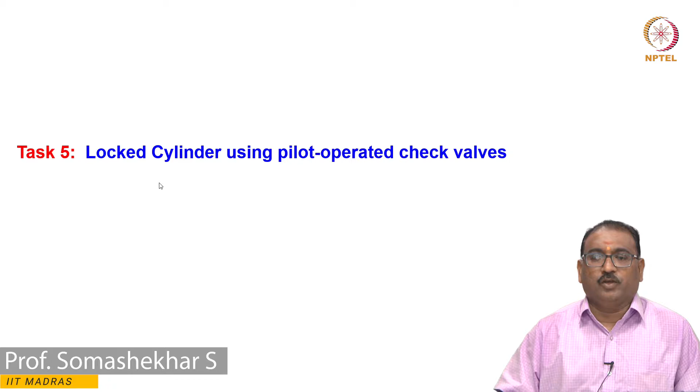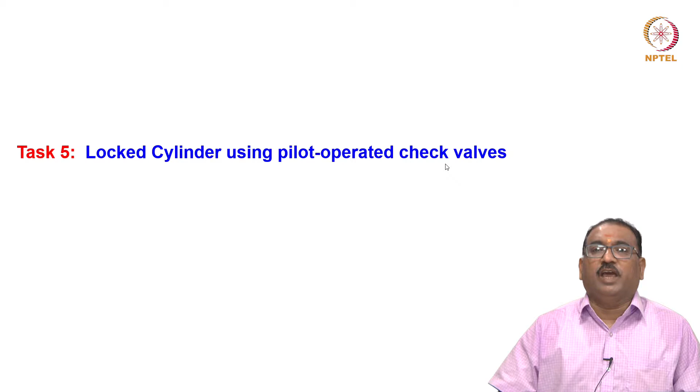Now we will see some more applications of the hydraulic circuit. Sometimes during extension and retraction we need locked cylinders. This is achieved using pilot operated check valves. Otherwise, after extension the cylinder may come back due to leakage and other losses. To overcome this, the cylinder should be locked in position. We achieve this using pilot operated check valves, which ensure locked cylinders.

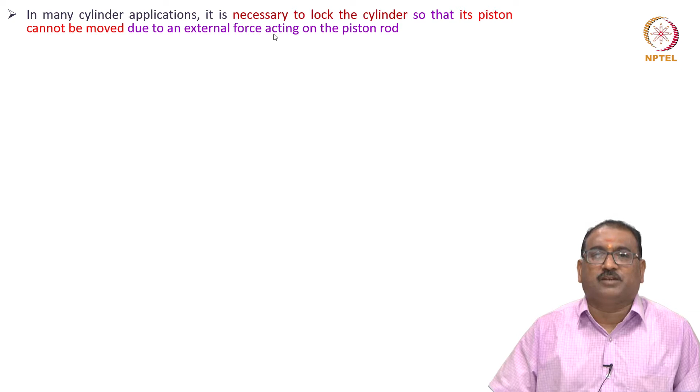As I have told you, in many cylinder applications it is necessary to lock the cylinder so that its piston cannot be moved due to external force acting on the piston rod. One such method for locking the cylinder is by using the pilot check valve as shown in the figure.

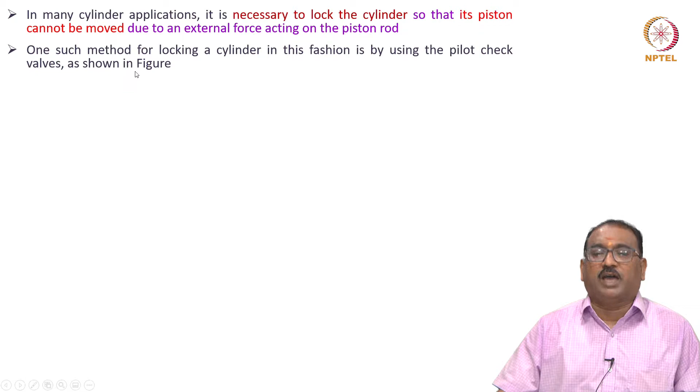You will see here the power pack, the 4/3 DCV in closed neutral position, and I am using NRV1 and NRV2, non-return valves, connected to a single rod double acting cylinder. I am using a pilot signal to operate NRV2 from this line, and a pilot operated line to open NRV1. This ensures the locked cylinder position. How this happens, we will see.

The cylinder can be extended and retracted normally by the action of the direction control valve, as we have seen previously, nothing else.

Please note, if regular check valves are used here instead of pilot operated ones, the cylinder could not be extended or retracted by the action of the DCV, because with a simple NRV, pump flow will come but get locked. For example, if you push this button, pump flow will come here, but here it is in a locked position. But if you use pilot operated valves, this will open when sufficient pressure is built here. That is the beauty of pilot operation.

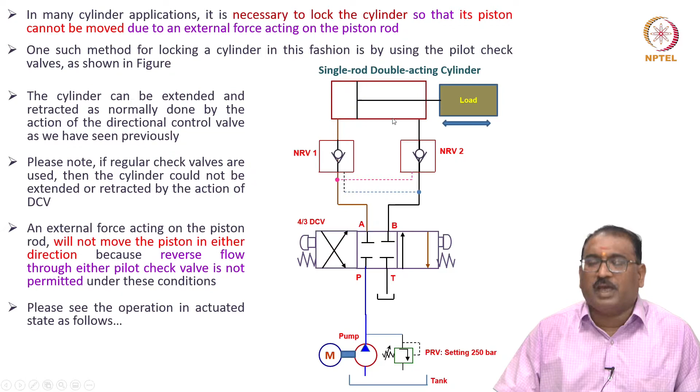Please see the operation in the actuated state. Always you have to draw the circuit in the null position, meaning no flow to the actuators. Now we will see when I operate the right side of the DCV button by pushing it, the pump flow enters here, lifts the ball, and goes to the head side.

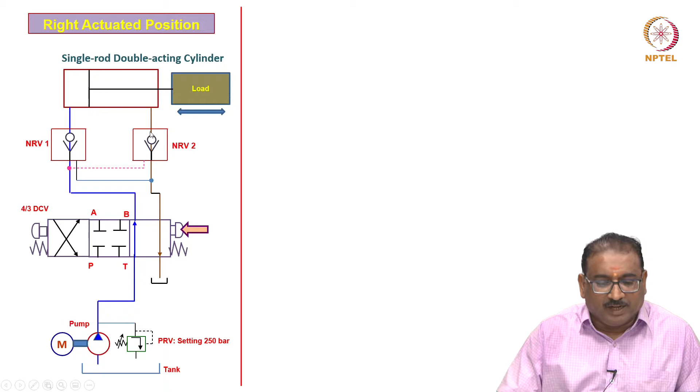Why does it open? After building pressure here, the pilot lines sense this and lift the valve, allowing return flow to take place. Similarly, when you press the left side of the DCV to get the crossed configuration, the pump flow will go to the tail side.

Whatever flow is there at the head side will come here. When does it open? After building pressure, because the pilot lines are there, you will see it lift. This pilot line is actuated, the ball will be lifted, then the flow goes to the tank.

But when you shift to the middle position, what happens? The cylinder will be locked in any position. That is the beauty of this circuit.

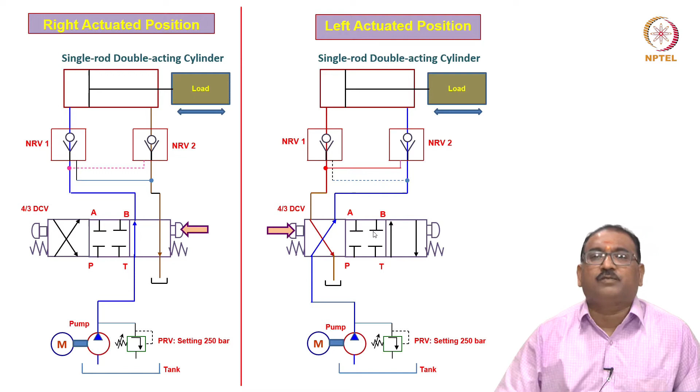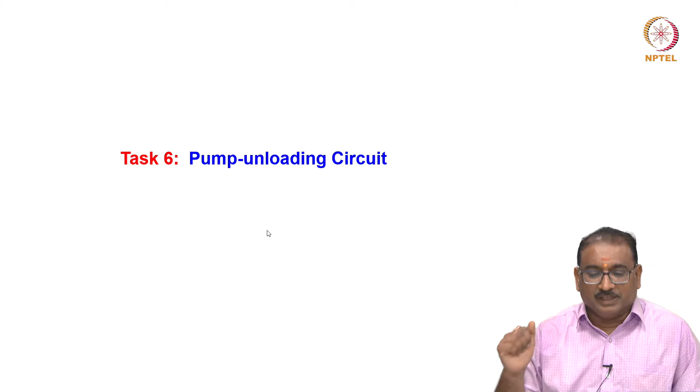Now we will see the pump unloading circuit. Sometimes when the cylinder extends, the pressure starts building, and generally we safeguard the pump by providing a PRV. But sometimes, for example in punching or bending operations, a large stroke and very high speed of the ram is required, then after reaching the workpiece we have to slow down the speed. In such cases, the pump unloading circuit plays a major role.

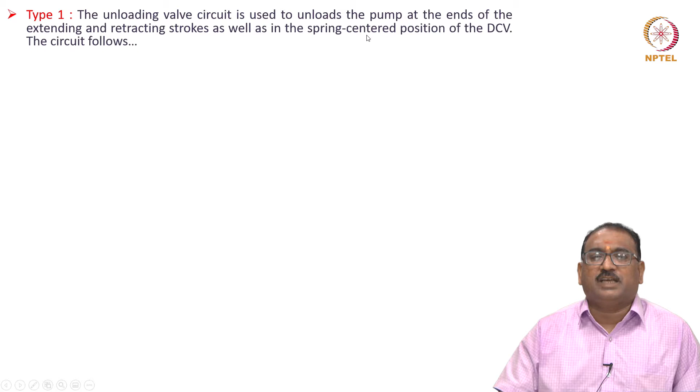Let us see now. I am showing you different cases here. Type 1 is the unloading circuit used to unload the pump at the end of the extending and retracting strokes, as well as in the spring centered position of the DCV. The circuit looks like this.

You will see the null position. It is a single rod double acting cylinder again here, with a 4/3 DCV. The middle position connections are shown here. Here I am using two valves, one of which is an unloading valve.

Here I am setting the unloading pressure rating as 100 bar. Then one more is there, the pressure relief valve, which is set at 250 bar.

Now we will see the unloading valve will read the pressure from the other lines. See here, it will read the line. Now I will show you how the unloading valve and PRV will operate.

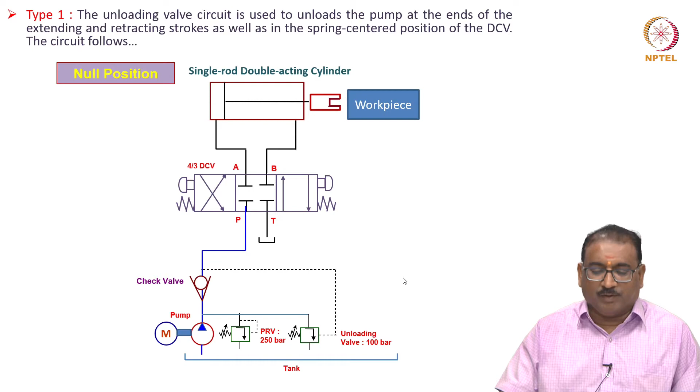Now we will see, right actuated button. When you press this, what happens, friends? The pump flow is coming here, then it enters the head side, then the piston starts extending. The pump flow is completely exposed to the head side, so it will move very fast.

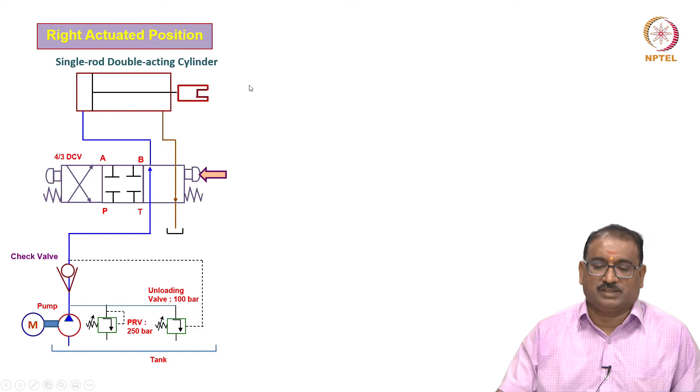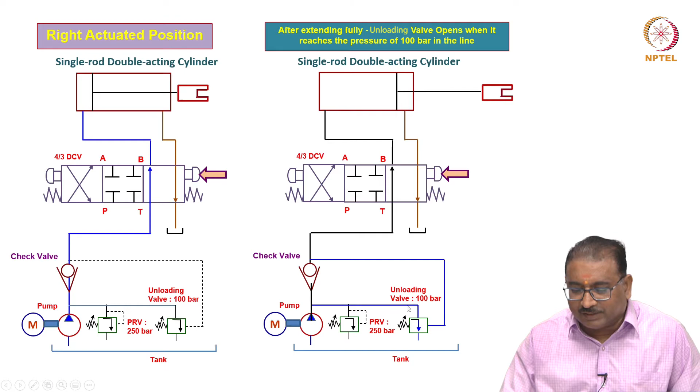Now we will see, after extending fully, the unloading valve opens when it reaches the pressure of 100 bar in the line. When 100 bar is reached, after full extension, the unloading valve shifts and opens. Then the pump flow comes here and unloads through this until you shift the valve.

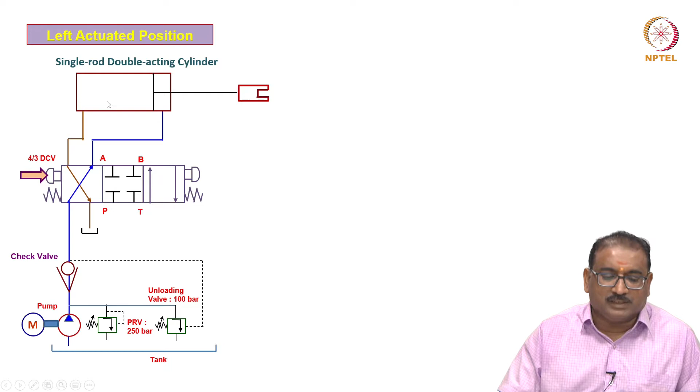Now we will see, when you press the left button of the DCV, what happens immediately? The pump flow comes to the tail side, then it is pushing, and whatever flow is at the head side goes to the tank.

But you will see, friends, after retracting fully also, the unloading valve opens when it reaches the pressure setting of 100 bar, which is less than the PRV. Once that pressure is reached in this line, the pump flow does not go to the circuit, it bypasses through the unloading valve, since the unloading valve pressure is less than the pressure relief valve.

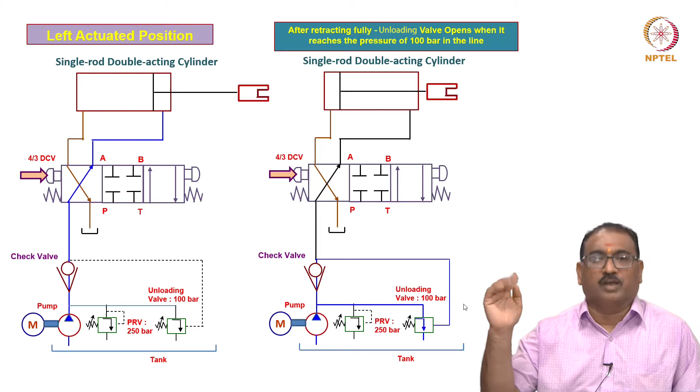As I have told you, when it is retracting completely, we have to bypass the flow through the unloading valve. Now I will show you how it operates in the punching operation, using the same circuit.

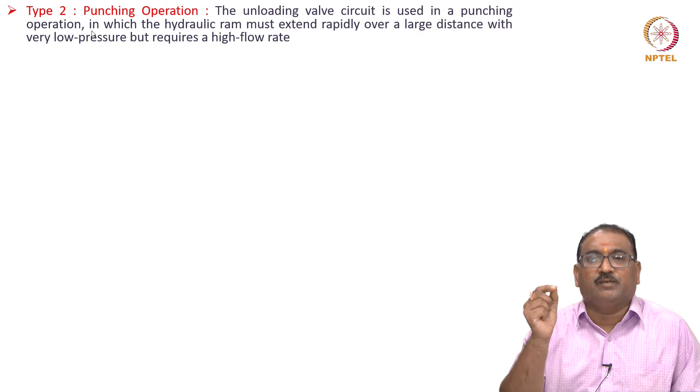You will see the unloading valve circuit is used in the punching operation, in which the hydraulic ram must extend rapidly over a large distance with very low pressure but requires a high flow rate, because I want to move very fast with no actions until it reaches the workpiece. However, during the short stroke, when the punching operation begins, the pressure requirements are high due to the punching load and resistive forces, and hence the flow requirements are very low.

In such cases, we have to use dual pumps, as I am showing you now, which may be driven with the same motor or a separate motor.

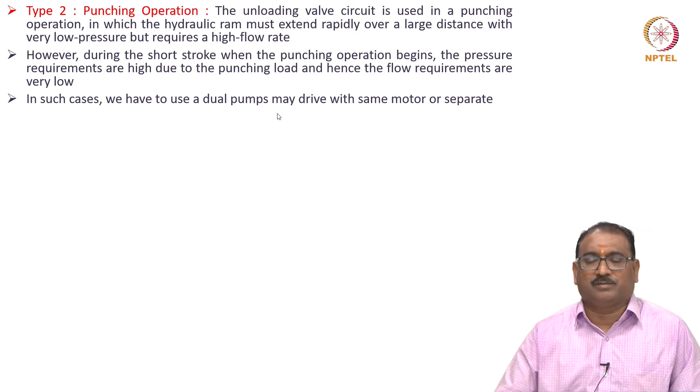Let us consider pump 1, which is a low pressure high flow pump, and pump 2, which is a high pressure low flow pump, required during the punching or bending operations. After reaching the workpiece, the actual operation will start.

Very short distance, it will move with very high pressure to complete the task. So the circuit eliminates the necessity of having a very expensive high pressure high flow pump by selecting the above two types of pumps to serve the same purpose.

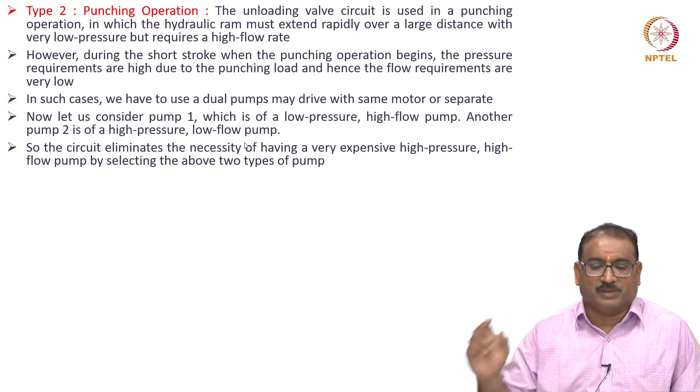Let us see now how it is. Here, pump 1 is a low pressure high flow pump. Pump 2 is a high pressure low flow pump, it produces low flow. Now I am using check valve 1 and check valve 2 to separate this one and this one.

Now, as I have told you, here is the unloading valve again. Here I am setting the pressure at 50 bar, but the PRV setting is greater, as I have told you, 250 bar.

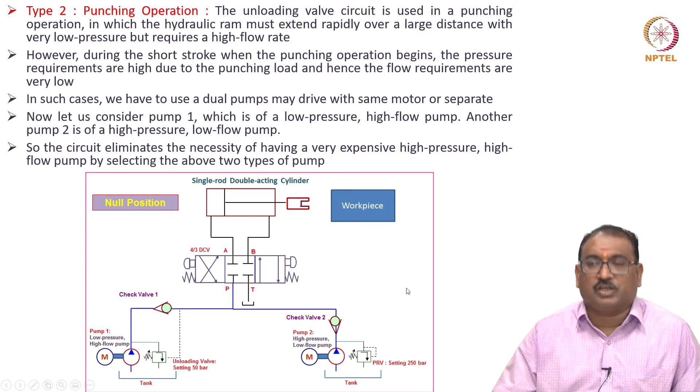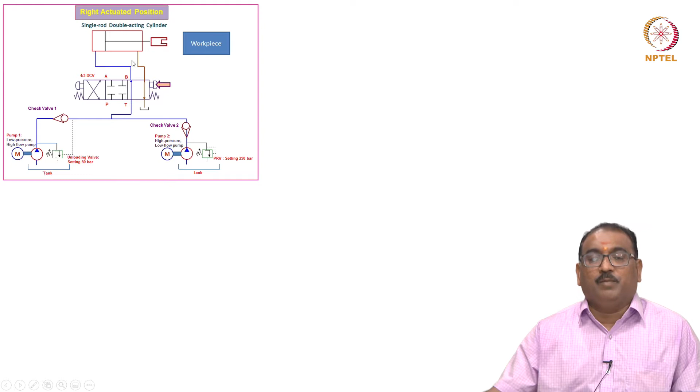Now we will see how they operate in the actuated positions. When I press the right side of the DCV, what happens? The actuator head will receive flow from the low pressure high flow pump as well as the high pressure low flow pump, meaning a large quantity of fluid is entering the head side, so it will move very fast.

After reaching the workpiece for punching or whatever the operation, the pressure starts building in the head side. Once it reaches the 50 bar where you are setting in the unloading valve, it will open. See here, flow is sending here. That time actual punching operation is required.

Then what happens? It requires a very low flow rate which is supplied by the low flow pump. Pump 2 is sending the flows. But this check valve 1 isolates from the circuit because the fluid will not enter the pump 1 inlet. That is why this check valve will do the purpose. Then it will complete the work with a shorter stroke with high pressure, as big high pressure because setting is 250 bar, no need to worry.

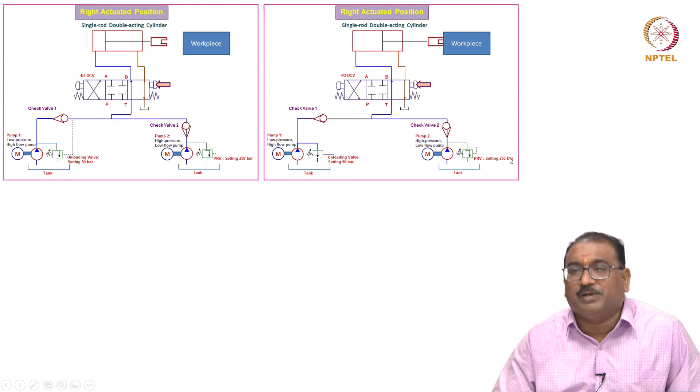When you press the left side button, automatically what happens? You will see the tail side of the piston is subjected to the flow from the high flow pump and low flow pump. Then it will retract very fast after punching the workpiece. Meaning these unloading valves are very essential. These unloading valves, like a pressure relief valve, both are closed, but unloading valve will monitor the pressure from the other lines, upstream lines.

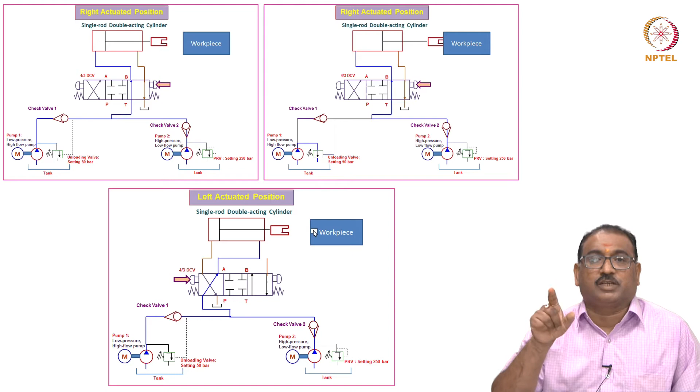Now, I will show you one more task, pressure reducing circuit. This is very much essential when I am having only one power pack of higher rating, 250 bar. I want to maintain the pressure in the different lines. Each line is operating at 50 bar, 100 bar, 150 bar like this. How to do it? Using the pressure reducing valve. How it will operate, we will see.

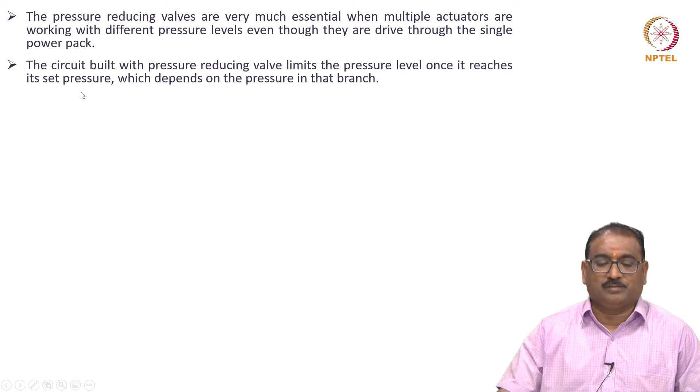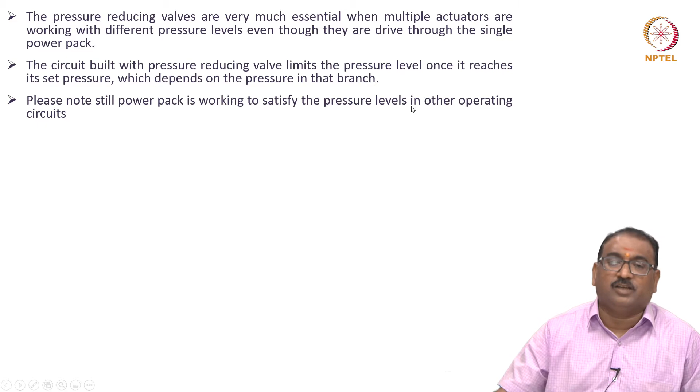The pressure reducing valves are very much essential when multiple actuators are working with different pressure levels, even though they are driven through a single power pack. The circuit built with the pressure reducing valve limits the pressure level once it reaches the set pressure, which depends on the pressure in that circuit. Please note, still the power pack is working to satisfy the pressure levels in the other operating circuits.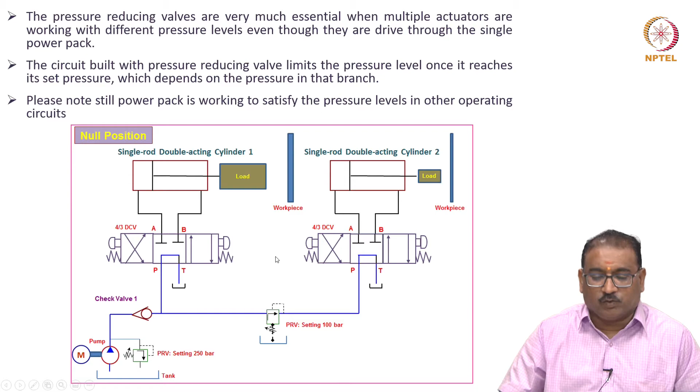I will show you how it operates. When we press the right button of the 4/3 DCV, the flow is coming to cylinder 1, see here through the parallel configuration. Similarly, here also from the parallel configuration, fluid is entering the head side, then the piston starts moving, extending, whatever flow is there at the tank, it will go. Correct, friends? But then the piston will move very fast.

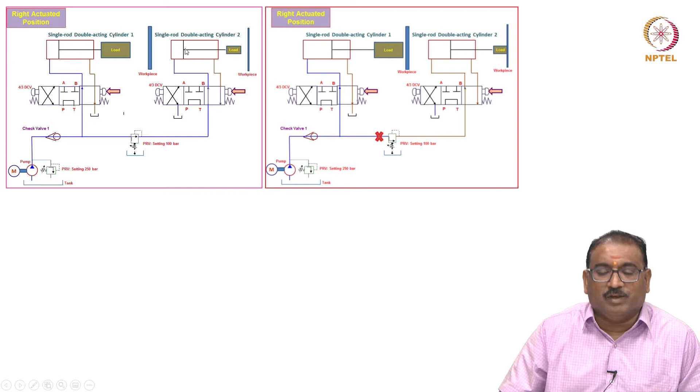Once cylinder 2 reaches the workpiece, what happens? Resistance starts building, pressure starts building in the line. Correct, friends? Then what happens here? You will see the pressure increases beyond 100 bar. Then automatically this will close, the pressure reducing valve will close, it will cut off the flow. But cylinder 1 requires higher pressure, it will work until it reaches 250 bar where I am setting the pressure relief valve. That time this is not receiving any flow, because already 100 bar is reached its pressure limit.

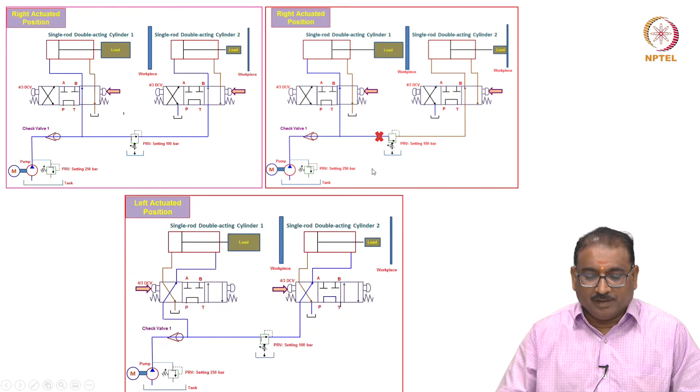Then please remember, friends, this pressure reducing valve, either two ends are subjected to high pressure, then leakage is prone to occur across the valve, so a drain is provided. Then once you press the crossed configuration by pushing this button, now we will see here both sides, flow at the tail side is coming here, see tail side fluid is coming to cylinder 2, then it will retract very fast, very fast.

Now, I will show you the sequencing circuit. This is very important when we are operating multiple cylinders, because after extending cylinder 1, cylinder 2 will start extending. After completing the assigned work, cylinder 1 extends, then cylinder 2 only extends. In such cases, we are using the sequential valve.

What is this sequence valve? I will show you now. Here it is, I am using the sequence valve. Cylinder 1 and cylinder 2 are here. Cylinder 1 is a clamping cylinder, cylinder 2 is a punching cylinder. The clamping cylinder, when it clamps the workpiece rigidly, then the punching cylinder will punch the workpiece.

Then it will retract, both will retract. How am I achieving this? You will see, friends, here I am using the sequence valve. The setting pressure here is 100 bar, it is a closed type. The sequence valve is nothing but the pressure relief valve integral with the check valve, nothing else.

Now, as usual I am using the DCV to direct the flow to the head side or tail side based on parallel configuration or crossed configuration, and this is a power pack. In the power pack, the pressure relief valve is the system pressure, maximum pressure I am setting 250 bar here, but the pressure setting for the sequence valve is 100 bar. Now, we will see how it operates.

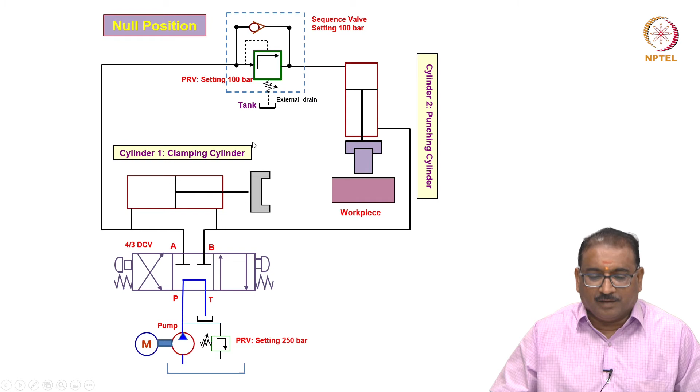When we press this push button, what happens? The pump flow enters the head side of cylinder 1, then the piston starts moving. The same flow is coming here, but you will see the valve is closed, also the check valve does not allow the flow. So only cylinder 1 extends and holds the workpiece.

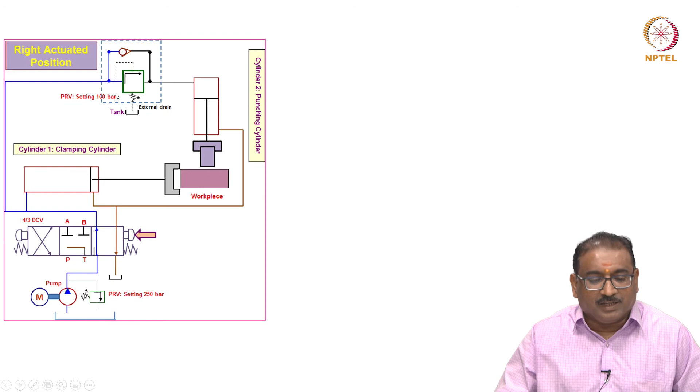Once the pressure starts building here, after reaching 100 bar in this line, this valve opens. In the right actuated position only I am showing you, please remember. Once it reaches 100 bar, this opens, then cylinder 2 extends to do the punching operation.

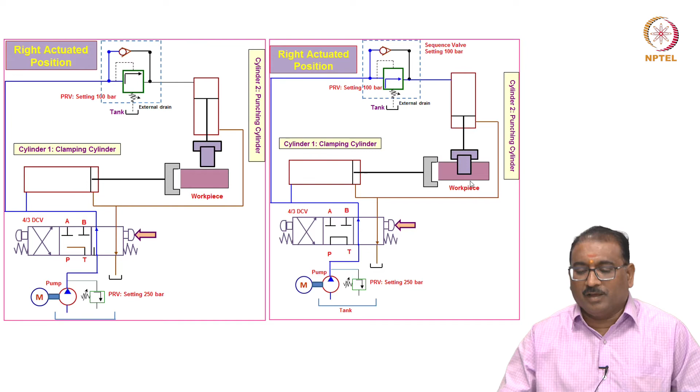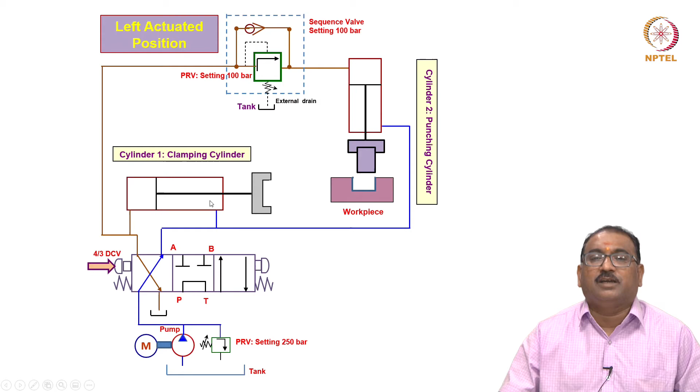After doing this, when you press the left actuated button, what happens? The flow enters the tail side here, and also the flow enters the tail side there. Cylinder 1 will retract very quickly, because the pump flow is directed to the tail side. Here also, the head side flow, when it moves up, is bypassed through the check valve, then it goes to the tank.

Now, we have seen many cylinder circuits. Now quickly we will see the control of hydraulic motor directions. If you use a bidirectional motor, it is rotating in the clockwise direction. Then if you want anti-clockwise direction, we have to use suitable valves. Similarly, you have to control the speed of the motors similar to the cylinders.

The same flow control valves are used here also. I will cover some of the circuits for hydraulic motors, but complete discussion on hydraulic motors we will discuss in detail when we start HST, hydrostatic transmissions, completely on hydraulic motors. We will see many circuits in that topic, but I will show you some circuits here.

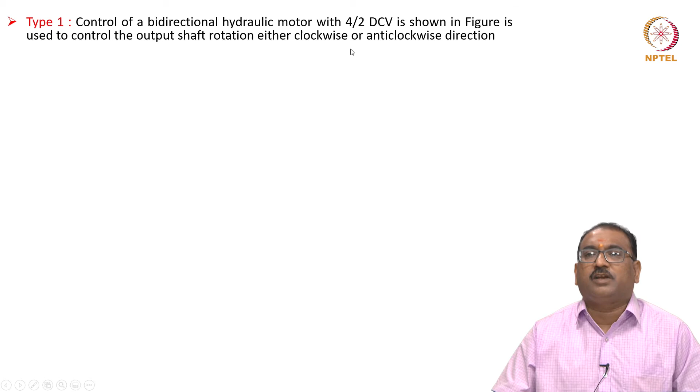Type 1 here I am showing you: control of a bidirectional hydraulic motor with a 4/2 DCV as shown in the figure is used to control the output shaft rotation either clockwise or anti-clockwise direction as required. Only direction control it is. You will see here the 4/2 DCV, it is in the null position. The flow is sent to one side, the other side flow is taken to the tank, then it will rotate in one direction. Based on the pressure, you will get the torque. Based on the flow rate, you will get the speed. Correct, friends?

Please remember, friends, when using the 4/2 DCV, in either position the motor is rotating clockwise or anti-clockwise. To keep closed control over the circuit, you will always put one valve called the 2/2 way valve, manually operated. After operating this one, the line gets energized. In all circuits you have to put one 2/2 way valve. 2/2 means the flow is either going or completely shut off. When not in use, you press the button and the flow is cut off to the entire circuit.

One button is very important, one valve is very important, you have to place it here. Now you will see when I press this button, the flow goes to the head side, tail side flow goes to the tank, and it will rotate in the other direction. Meaning by using the 4/2 DCV, you have to reverse the direction of the hydraulic motor.

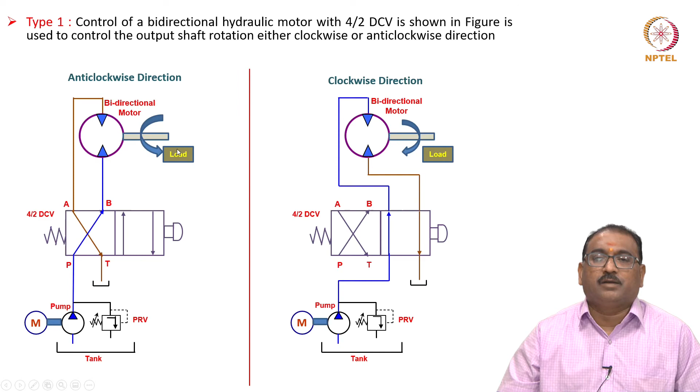As I have told you, when you shift the left side button, the motor will rotate in this direction. When it is rotating with the fluid flow and you shift to the center, you need to worry about the motor because it is pushing the fluid out. It should be relieved, otherwise there are pressure pulsations or other issues happening in the motor.

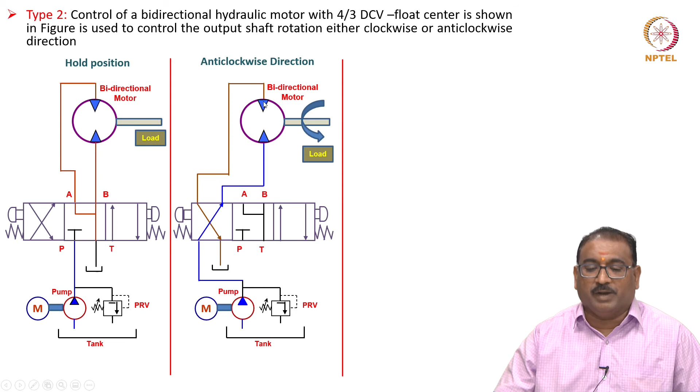Whether you move from the left side to the middle position or right side to the middle position, the float neutral is always very good for controlling bidirectional hydraulic motors. Now I will show you one more valve, the brake valve.

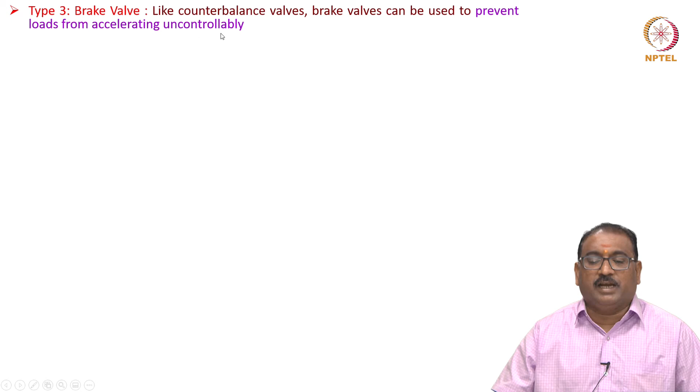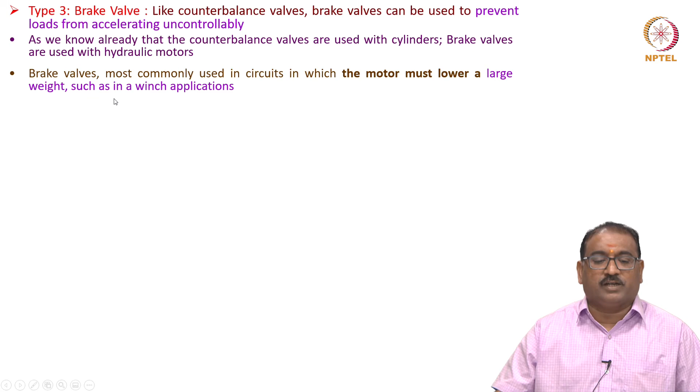It is like a counterbalance valve. The brake valve can be used to prevent loads from accelerating uncontrollably. As we know, counterbalance valves are used with cylinders, brake valves are used with hydraulic motors. Brake valves are most commonly used in circuits in which the motor must lower a large weight, such as in winch applications. A simple winch circuit is shown here.

See here, this is a bidirectional motor. Both side pressures are monitored, the head side as well as the tail side. Here it is a brake valve, which is nothing but your counterbalance valve. But you will see here it is a pressure relief valve integral with a check valve. Since it is always subjected to pressure on either side, an internal drain is always provided.

Now I am using here a 4/3 DCV closed neutral. When the weight is lowered, it may tend to drive the motor instead of the motor lowering the load. This is known as an overrunning load. In this situation, the load will probably accelerate too quickly. The motor is being driven by the load and is basically acting as a pump. When this occurs, the pressure at the outlet will be higher than the pressure at the inlet.

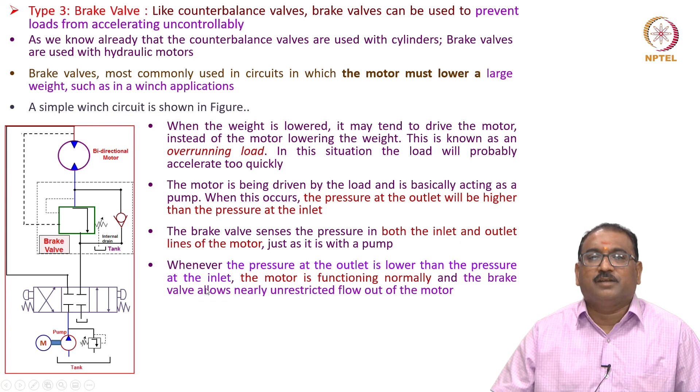The brake valve senses the pressure at both the inlet and the outlet lines of the motor, just as it is with the pump. Whenever the pressure at the outlet is lower than the pressure at the inlet, the motor is functioning normally and the brake valve allows nearly unrestricted flow out of the motor. When the pressure at the outlet is higher than the inlet, however, the brake valve closes partially to provide enough back pressure on the outlet of the motor to keep the load in control.

The check valve allows the valve to be bypassed when the weight is being raised.

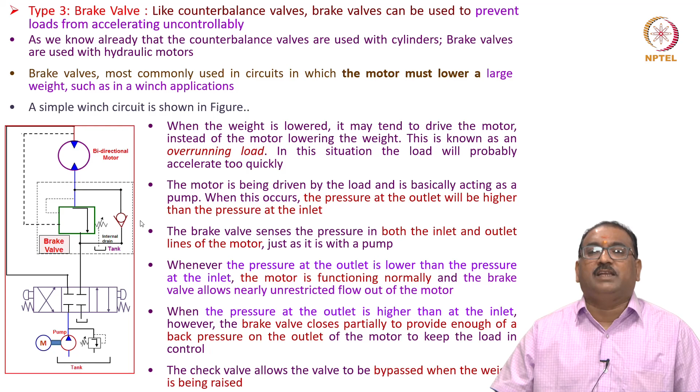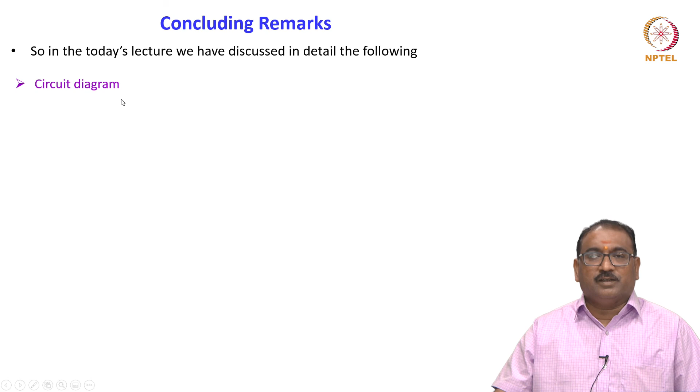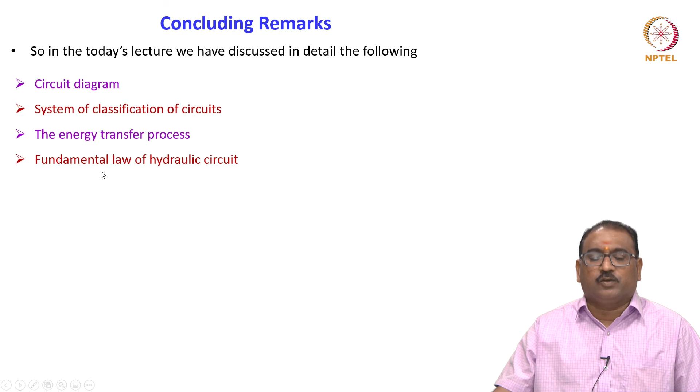So we have seen many circuits. Finally, I will conclude today's lecture. We have discussed in detail the following: the circuit diagrams, system of classification of circuits, the energy transfer process, fundamental law of hydraulic circuits, technical details of individual components, general requirements for hydraulic circuit design, and some typical circuits to control both cylinders and motors. Motors we will still discuss further when we cover hydrostatic transmissions.